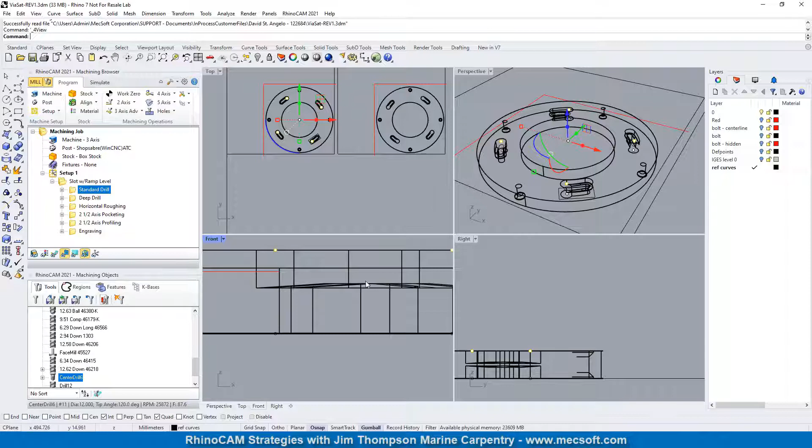That, I definitely had a problem with. Yeah, this area right here is tapered. So, as you know, there's more than one way to do anything.

So I'm just going to show you the way I did it. And as far as the accuracy, it came out right on the money. So here I'm going to just go through the motions and show you.

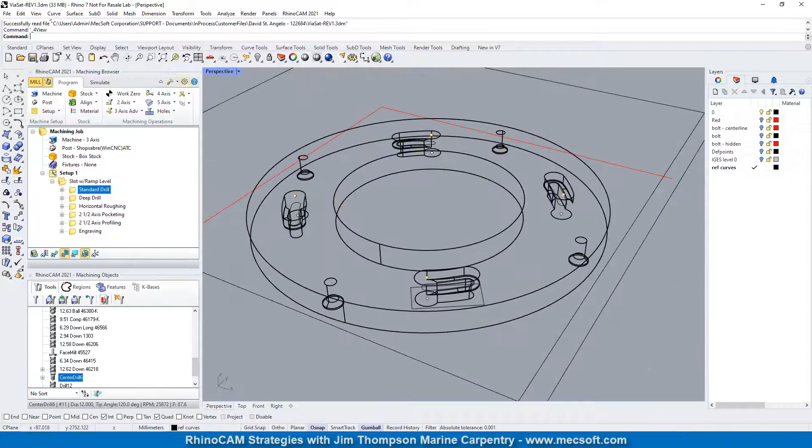Let's go to shaded view so you can see that. Okay, the first thing I did is, you see these curves here? Yes.

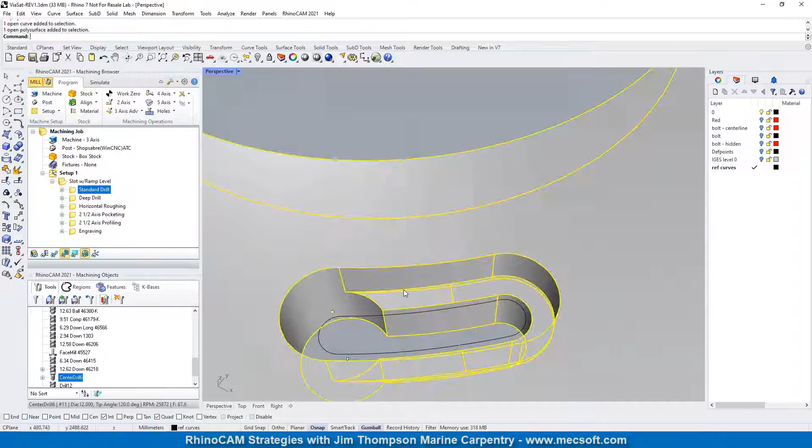What I did was I offsetted these edges along here. On the inside? The very outside, yes. Yeah, on the outside edge.

Yeah, because they represent the taper all the way to the center. So I offsetted them out, and that's this curve here. And then did the same thing on the other side, that's this curve here. Do you understand what I did?

So you did the offset on the outside, and then you did the offset on the inside as well. Yeah, I did this side offset, and I did this side offset to get these two curves. And if you look at this in...

Let's look at this, and then let's make that shaded. You can't see it in shaded, so let's make it wireframe. You're not going to be able to see it there either, I don't believe. So let's just select this.

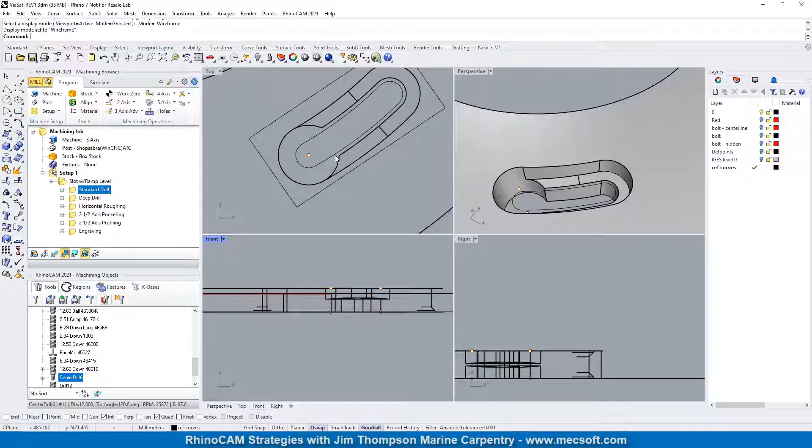Okay, you see that it has the slope in it? The curve, that's what we wanted. What I'm going to do there is drive a tool using an engraving operation, and that way the tool will cut this whole shelf.

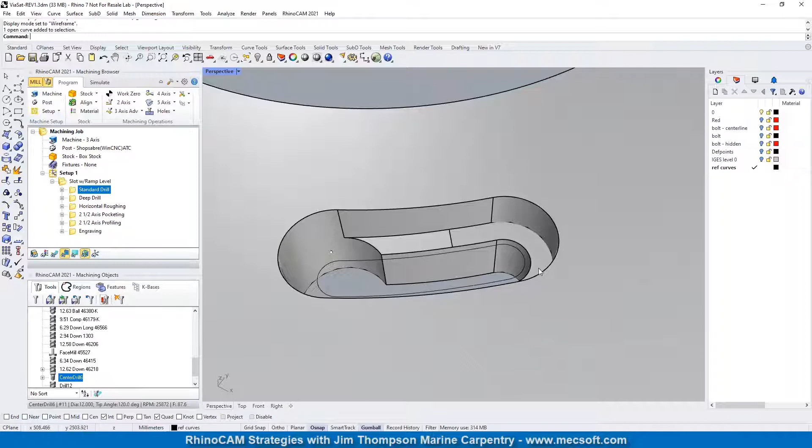But that's the last operation. And what I did, in order to make sure that my start and end points were right, because I want to start out here in the hole and come this way, so what I did there, are you familiar with regions?

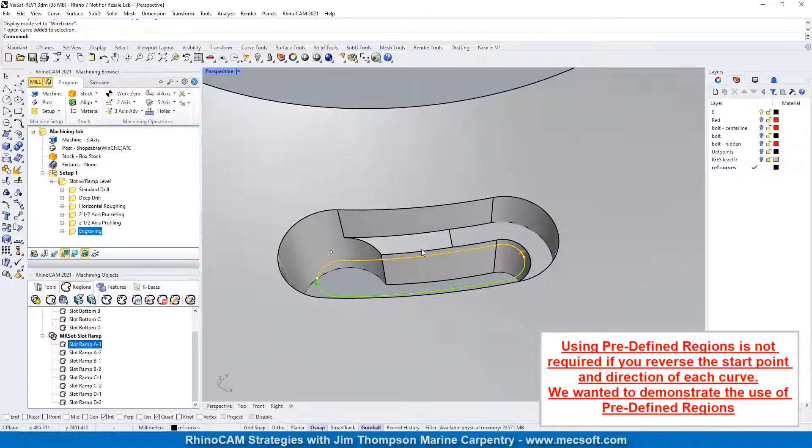No. Okay, so what I did was, for the ramp, I created two regions for each hole. The first two, I'm just looking at this one hole. So you see on this first region, the start point is here, pointing this way. And on the second one, the start point is here, pointing that way.

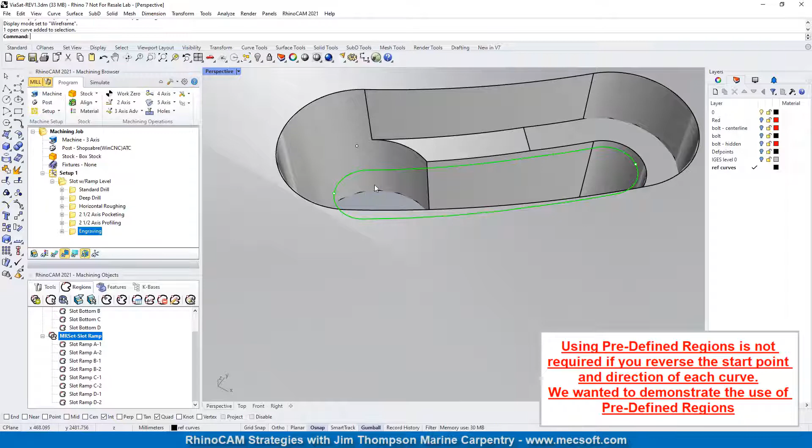And you just use this, with the, let's go up here, to create those regions, you would just use the curves that we'd already created. So what that's going to do is, when I do my engraving, it's going to make sure that it starts here, goes around to the end, starts here, and goes around to the end, so to clear that off.

So basically what I did was started off with a drill. I just basically want to do a spot drill, and then I'm going to do a deep drill with that's a drill 14, I believe you had a drill was at 14 millimeters diameter.

I used what's in your tool library as much as I could. So basically, I'm drilling a through hole to get access right here.

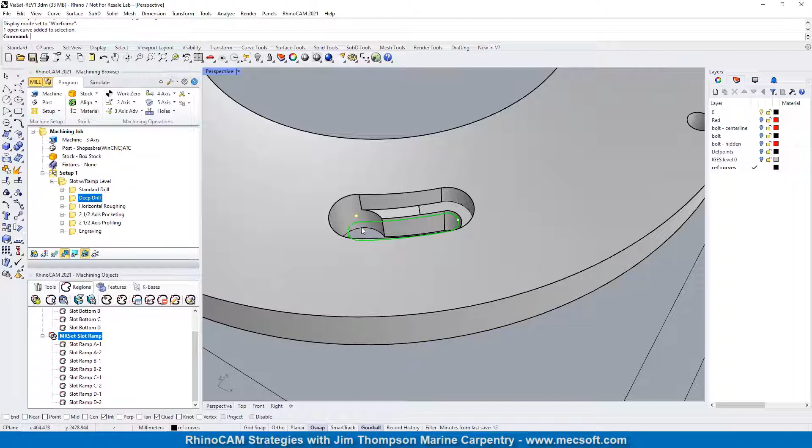Then we're going to do the horizontal roughing. Let's go look at this. So I just picked this top perimeter for the roughing. We're going to use, this one actually uses a 9.5 flat mill that you have.

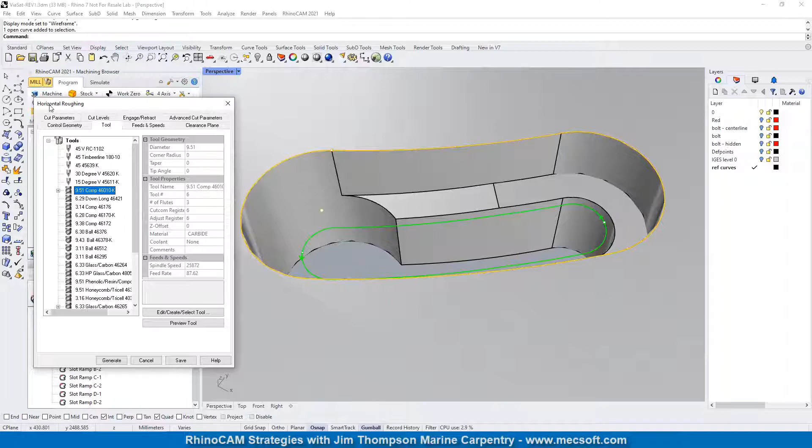Well, when you do it yourself, you can obviously just change the tools and change the feeds and speeds, etc., but the strategy is all going to be the same. So basically, I'm doing a horizontal roughing, using a 9.5 diameter flat mill, and for the control geometry, I'm also creating a start point right here in the center because this is already drilled out, okay?

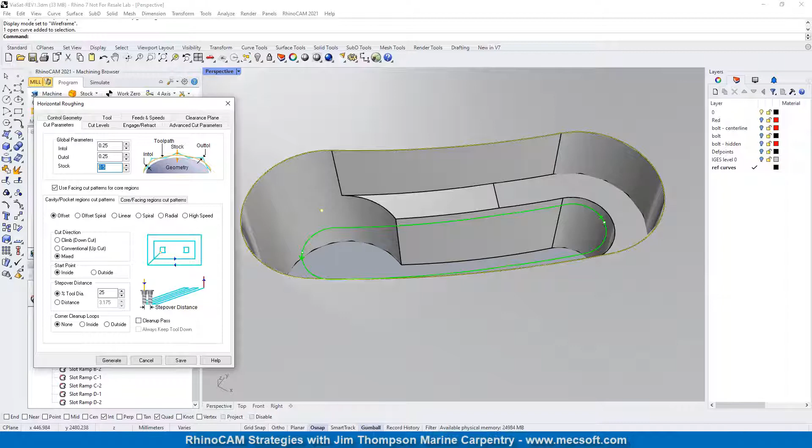So we're just using some standard parameters, offset cut pattern, 25% step over, leaving a 0.5 millimeter stock, and we have a top and a bottom set for where the cutter's tool first level is and where the last level is, okay?

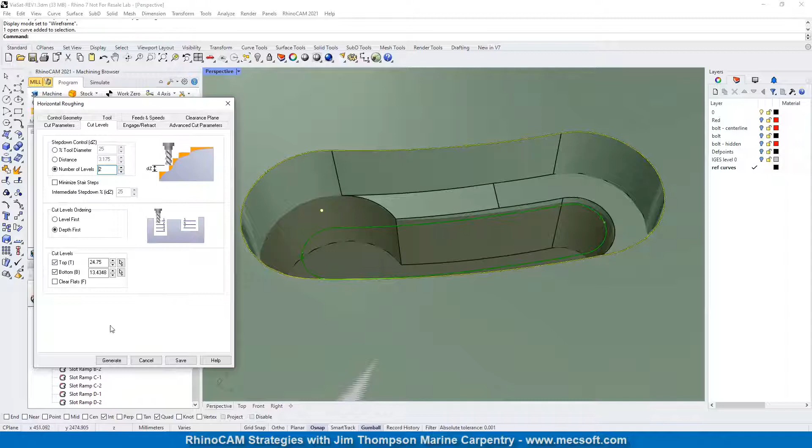Because I don't need to cut way down in here, I'm just cutting in the bottom. Let's go ahead and generate that and look at the tool path. Yeah, it's just cutting in the bottom area.

So let's go ahead and simulate what we got so far. So we're gonna do this, and we're gonna play that. So there's our access, we're gonna do a deep drill. So there's our hole access. Then we're gonna do our roughing.

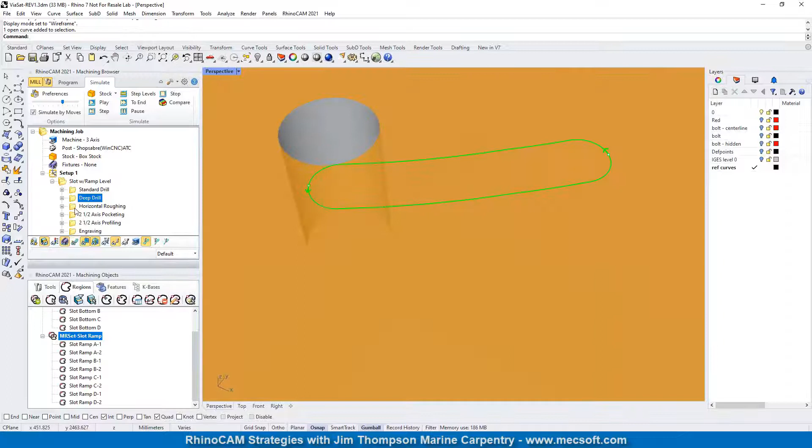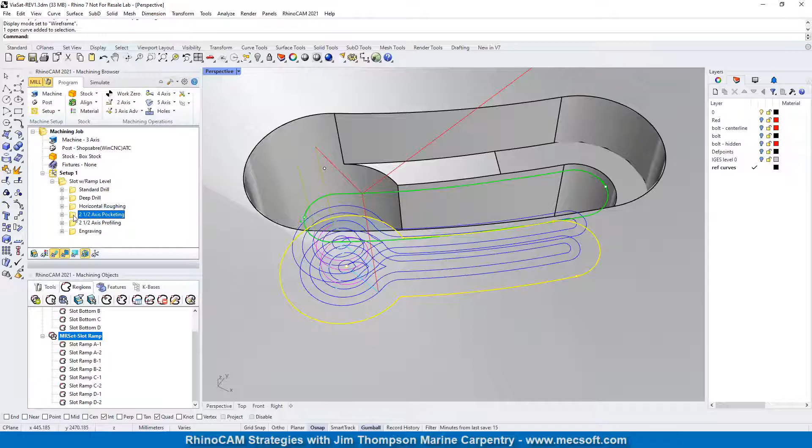Okay, so this is what we got after the roughing. So you can see this is just a flat area right now, everything is roughed out. So then we go down and we do the pocket for the bottom area. And again, in the pocketing, we just used the smaller 6.3, and we're leaving 0.2 on the sidewalls. So let's go ahead and generate that, and let's go ahead and simulate that.

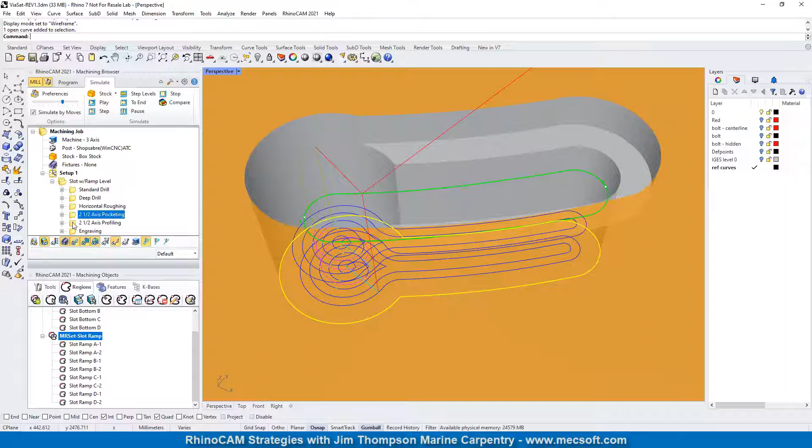And why do you leave the 0.2 on the sidewall? I'm going to come around with a finishing pass because this is two different cut areas, and you may see some witness lines up here when you cut this area versus cutting this area. So I'm going to go in there with a profile and one clean pass all the way around. That's this one here, I got you. So we'll just slow that down. I'll show you what I'm talking about.

So it's going to make one real clean sidewall all the way around it, top and bottom. Awesome, that's nice, okay. And then it also goes past the start point, and this will clean up any witness lines inside. So now here comes the interesting one, the engraving.

What this is going to do, like I mentioned previously, it's going to start here, go all the way around, and do all of your contoured surface there. So let's go ahead and simulate that. Well, let's pause that for a second. Well, I don't have that.

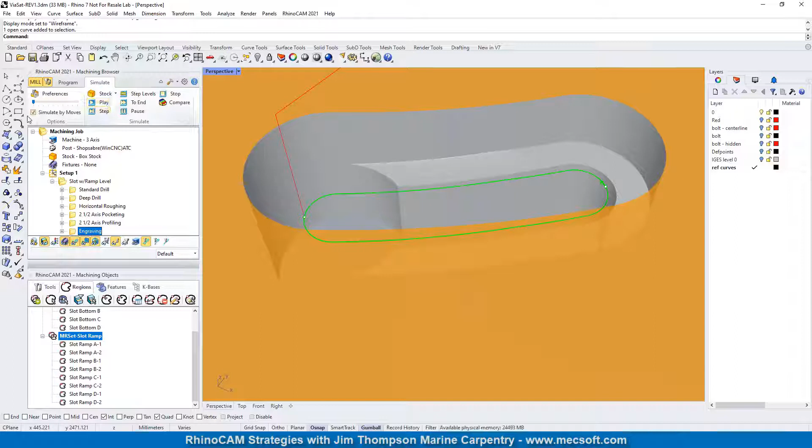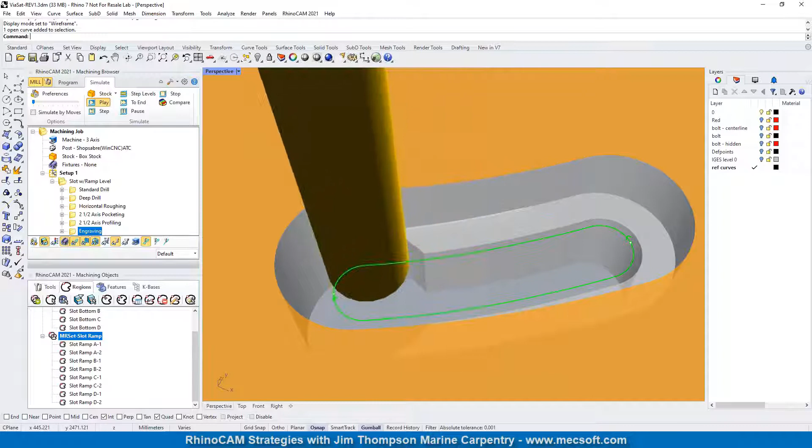So here's the finishing on the shelf. So it's going up that slope, it's going around, and then it's going down the slope. So what you see, let's turn the tool off, is a nice clean sloped slot. You can see the tool mark right there where it starts going down.

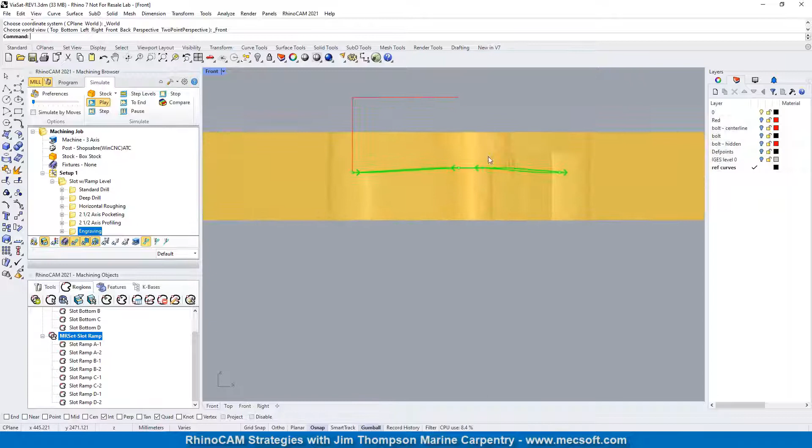Yeah, and let's look at this on a front view, or see if we can see it on a front view good. Here's your contoured curves that it's following. That's one way to do it. That to me was a pretty accurate way of doing it.

Let's go simulate. Now it also has the other side on, right? That I'd have to flip the part over. Yeah, I didn't mess with the other side. The other side doesn't have anything fancy on it. There's just pockets underneath. Was there any sloped areas down under there?

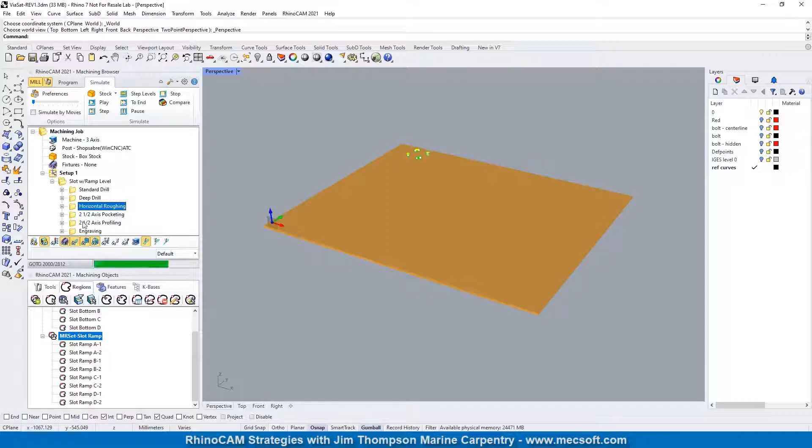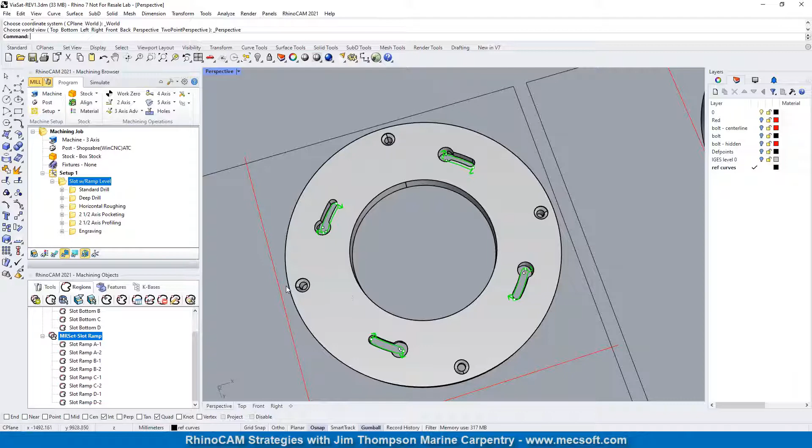Okay, so you just got these areas over here. This whole thing is being cut out, so that's done. You just do your counterbore holes. And if you want to verify that, we should still have this simulation.

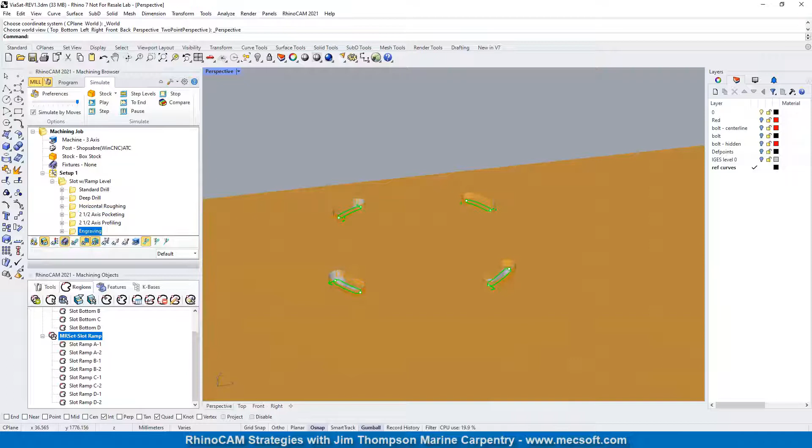No. Let's just simulate it real fast. Okay. So there's your bottom half all the way through, and then your top half.

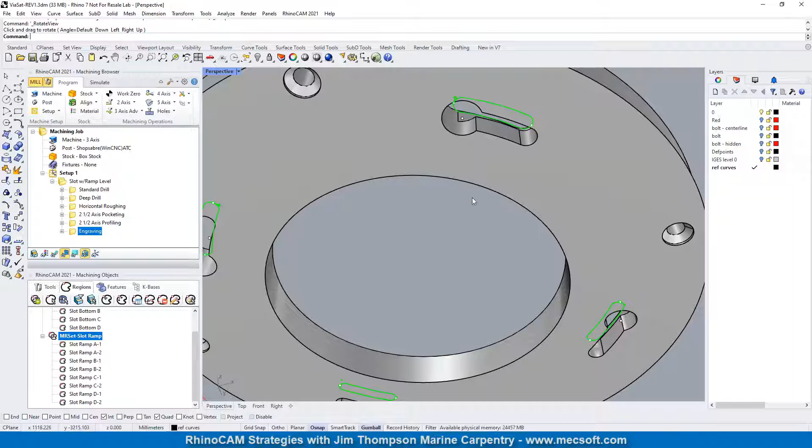So I do not need to flip it? Oh, you do, you got other features down there. You got to machine these. Yeah, so you will have to flip it, but you won't have to flip it for these slots. Those slots are done, okay. So all you got to do is these 4 countersunk holes. Okay, does that make sense?

It does, but I also don't know how to do that. What's that? Do what? To countersink the hole. Okay, well, let's just — it's one tool that I can normally use for all this material. It's that G10, it's extremely hard. Mm-hmm, mm-hmm, okay, I use only that same.

Okay, well, while we're on the phone, let's just flip it over with another setup. You're running, let me double check. Are you on the Pro configuration? I believe you are. Sure. Okay, so let's just flip it over, do another setup. Let's turn...

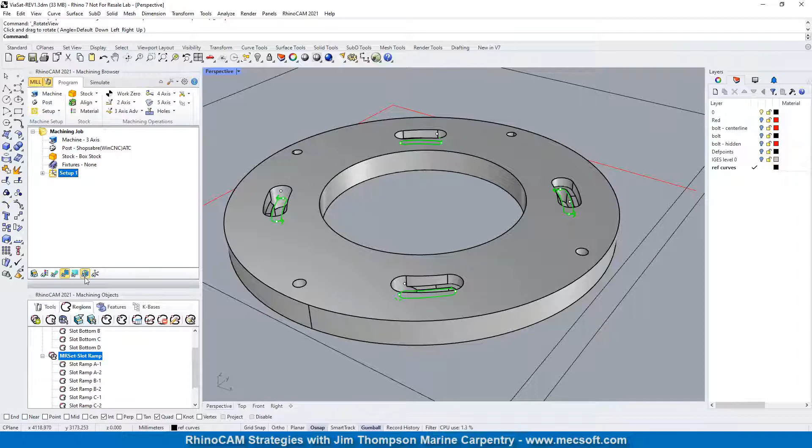Okay, so there's our axes, and we're just gonna go another setup. So I think when I send it to you, one side is one way and the other side is the other way. Oh yeah, there it is right there. I see what you're saying. Well, you understand about how to redo the setup for the other side. So...